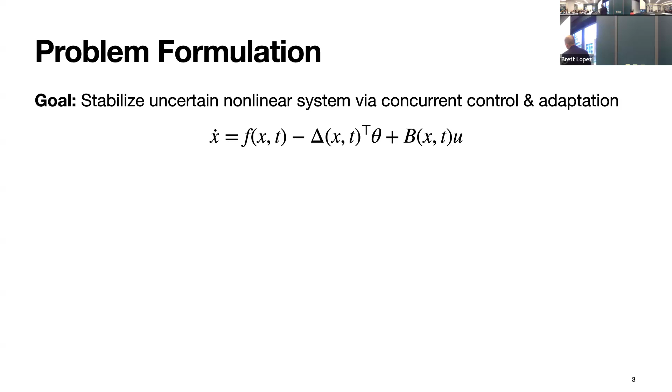All right, and so we're going to start off with this system, and we're going to impose this assumption. And this should be the only assumption that we really impose throughout the talk, is that the parameters belong to some known compact convex set, right? Which really just means that we can basically bound the parameter estimation, right? Which is pretty standard in most applications, right?

You generally have a rough idea of, well, I know this parameter has maybe some distribution, maybe it's uniform, maybe it's Gaussian, whatever. But you can almost always formulate or impose this assumption without too much concern about what may happen. So we're going to impose that these parameters are bounded.

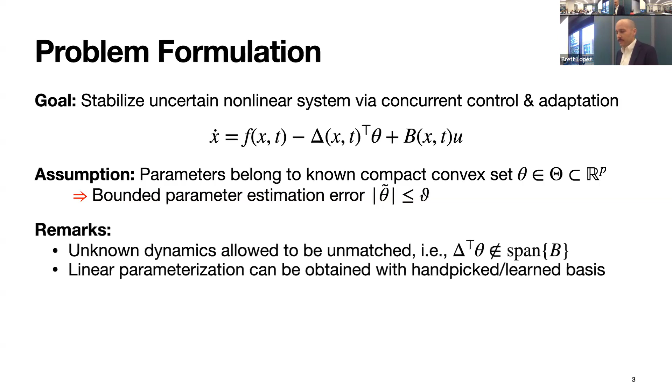And the thing that we're going to relax the most, and this is what we'll talk a lot about today, is we're not necessarily going to impose that the uncertain dynamics are matched. So we're going to let them be unmatched, which means that they can be outside the span of the control input matrix. And for those that haven't dealt with adaptive control before, once you relax this condition, the problem becomes really hard, right? And I'll show you why in a second.

And for anybody who's nitpicking about, well, linear parameterization, that's not very general, you can stop listening if you want.

That's your choice. But in most cases, if the system isn't linearly parameterized, you could always handpick basis functions or learn basis functions to represent those uncertainties as linearly parameterized. Now, of course, you lose some of the physical interpretation of the parameters, but you could always apply this re-expression of the uncertainties as linearly parameterized.

All right, so those are the two. Well, the main assumption is linear parameterization. The other is bounded parameters, or you have a bounded set. But we are not going to impose that the uncertainties are matched, right? We're going to leave them fairly general.

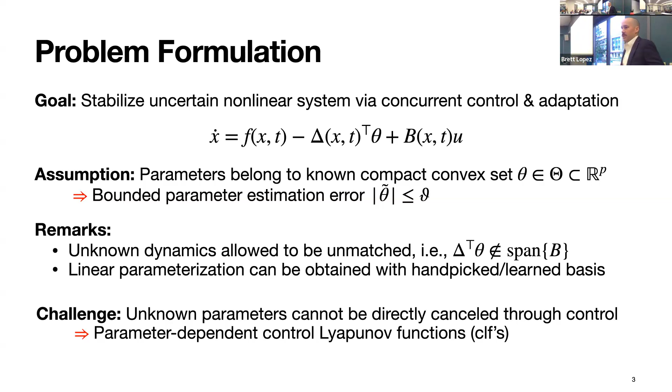All right, so why does this happen? Well, let's go back and do a little bit of review of the certainty equivalence principle, which is kind of the bedrock of adaptive control, right? And so the idea behind the certainty equivalence principle is a fairly intuitive design philosophy, which states that you're going to design your controller as if you know the parameters offline, and then you simply replace the parameters with their estimates via some adaptation or estimation. It's a very powerful design philosophy, fairly simple, fairly intuitive, which is why it's probably so popular. It's pretty effective.

Now, of course, the caveat here is this requires a suitable adaptation law, but we'll get there as to what that actually means. And so this proposition, which is pretty easy to prove, states that if the model's uncertainties are matched, so they're in the span of the control input matrix, then some suitable CLF that satisfies the stability criteria does not depend on the unknown model parameters themselves.

So the easiest way to see this is, now you have these uncertainties being multiplied by your control input matrix, within the span of the control input matrix. I can simply define this new control input, again, assuming that I know the parameters. I can get this new system that does not depend on theta, right? So it doesn't depend on the unknown parameters. And I could design or compute a CLF for this system. And since the system only depends on X, intuitively, of course, it's not going to depend on theta because theta no longer really exists in those dynamics.

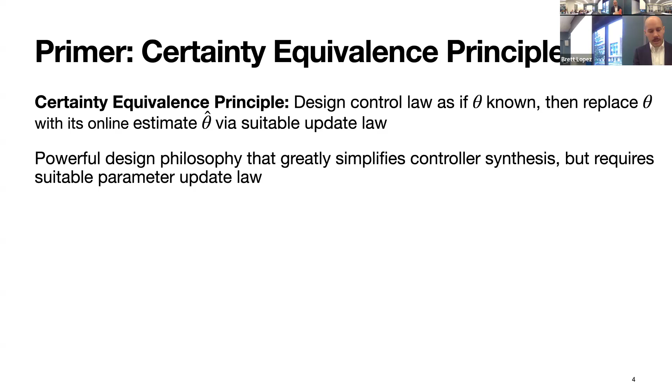In some cases, can't you just get a CLF which depends on the bounds and the parameters? Yeah, so I'm going to talk to you about the robust version of this. And so regardless, even in the robust case, you still have to pick a nominal value. So there's still some notion that this depends on whichever candidate. It might not just be one that's being updated online, but it still has some dependency in the sense that I have to pick something, so you kind of introduce this dependency.

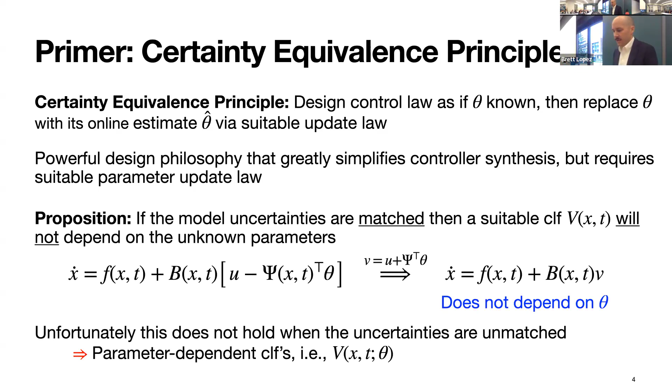All right, so what are a couple ways to handle this extra dependency that we now have to consider in the control design phase? So a nice segue to robust control. Probably not as in-depth as it should be, but typically in robust control design, you are looking at designing an input-to-state stable, or ISS, controller, where you pick some nominal value of the parameters and synthesize a controller that's going to be robust to the parameter. This can be conservative, depending on how large your uncertainty set is. And generally you can only get bounded error.

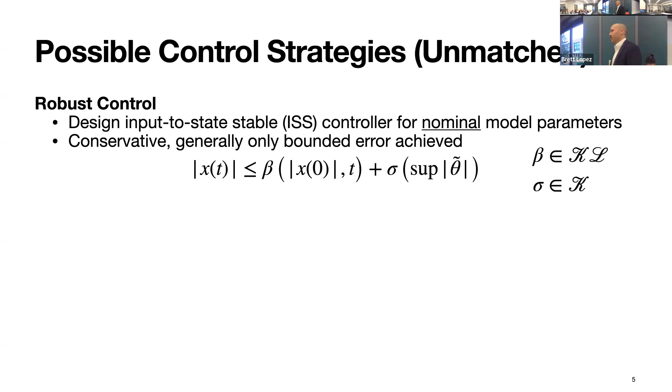So I have this expression here where beta is a class KL function, so this will tend to 0 as t goes to infinity. But then we have this class K function that depends on the max parameter error. And unless you just so happen to pick the absolutely correct parameter values when you're designing your ISS controller, this term is going to be non-zero. So you're only going to be able to get bounded tracking.

So one way to try to get around this and still achieve zero tracking error is to basically combine this robust control strategy with some online adaptation or online model estimation. This is where indirect adaptive control comes in. You still have your ISS controller, and now you combine it with a model estimator. And you can show that your dynamics will then satisfy this inequality bound, where again you still have the class KL function beta. And now you have a class K function sigma where hopefully this term tends to 0, since you're going to be updating theta. So hopefully theta tilde is going to 0, so your parameter estimates are hopefully converging.

But the tricky part is you now have to impose that the system is also ISS with respect to the adaptation of the parameters. As the parameters are being updated, that parameter update could actually destabilize your system. So not only do you have to be robust to the parameter error, you now also have to be robust to the transients of the adaptation, or of the parameter estimates.

And then there's direct adaptive control, which definitely departs from these techniques. This is what we'd call more goal-oriented control, where the adaptation is purely to achieve zero tracking error. There are no robustness guarantees per se; we're not imposing any robustness. So we're not going to get these nice bounds, but we can derive adaptation laws using Lyapunov-like stability arguments to ensure that the closed-loop system converges to whatever desired behavior we want.

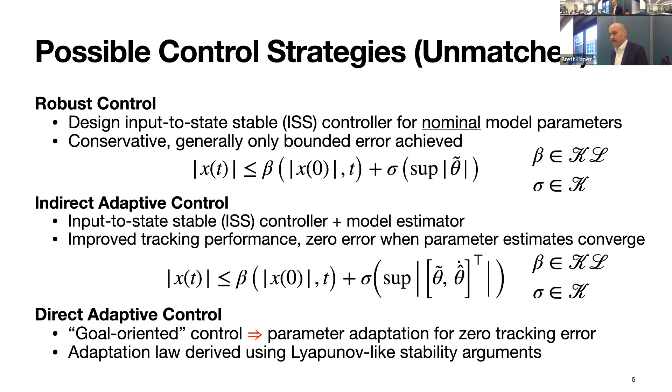And so what I'll be talking about today primarily is dynamic adaptation gains, which is a direct adaptive control framework where, not to spoil it, essentially we're going to be updating the adaptation gains online to circumvent the stability questions that come with parameter adaptation. Essentially we're canceling out the destabilizing terms associated with the transients of the parameter adaptation. And these adaptation gains are going to be updated individually, so very targeted.

I'll talk about a couple of extensions, one on adaptive optimal control and adaptive safety, where we employ these adaptation gains, combining them with value functions and also control barrier functions. And if there's time, I'll briefly talk about a recent paper we published at CDC on adaptive robust control contraction metrics, where we go back to the indirect adaptive control paradigm, but we synthesize these ISS controllers using contraction theory. But we only require ISS, or robustness, with respect to the parameter error, not the parameter transients, so we get something simpler and more systematic. We'll see if I have enough time to get there.

All right, so we're going to start off with this definition, which is pretty analogous to what you've probably seen in standard nonlinear control theory, where you start talking about control Lyapunov functions. But here we have an unmatched control Lyapunov function, and it states basically the same conditions as we have for a control Lyapunov function. But you want to satisfy this inequality for each theta. So for each possible model realization, you want to be able to synthesize a control Lyapunov

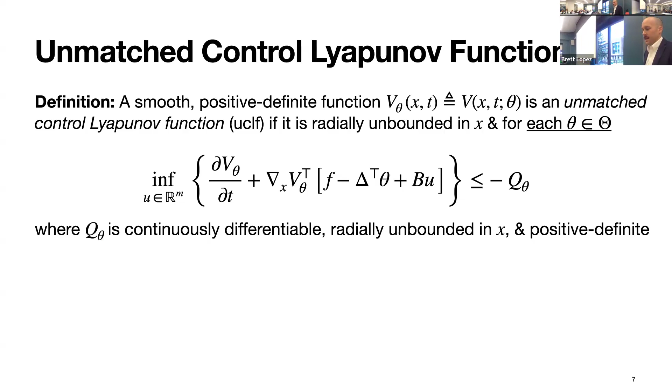function. And the key point here is that you're not just finding a Lyapunov or control Lyapunov function for all possible models. So instead of finding one control Lyapunov function that works for every model, you're basically finding a family of Lyapunov functions that works with a family of possible models. And what you could show is that these UCLFs, or unmatched CLFs, exist if and only if the system is stabilizable for all the parameters in our parameter set. Which is a fairly weak condition.

If you have a system that has a high degree of uncertainty, the minimal thing that you could ever impose on the system is that no matter what model comes up, the system still needs to be stabilizable. Otherwise, might as well pack up, go home, ask for another actuator placement.

You just said that V is radially unbounded, so you're just going to guarantee that X is bounded, not necessarily that it converges to something. So radially unbounded in X. We still are imposing that this will be 0 at the origin, or that actually comes up in Q because we'll be using Barbalat's lemma a lot. So it actually ends up being that V doesn't even have to necessarily be positive, or necessarily 0 at the state. Mostly, we'll be looking at Q.

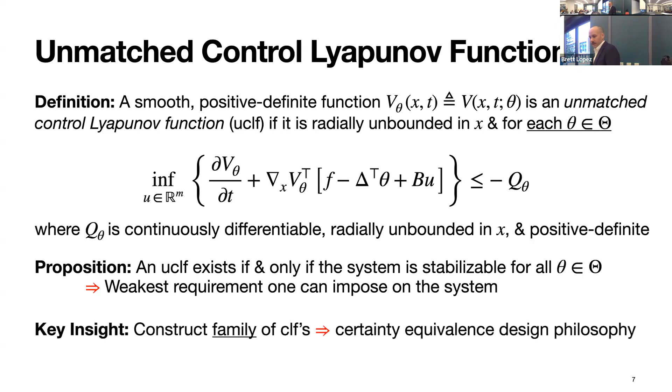So again, this proposition basically follows the same kind of CLF result that states the equivalence between stabilizability and the existence of CLFs. But now we're just broadening this out to stabilizability for possible models that the controller may encounter. And again, the key insight here is we're essentially going to be constructing a family of CLFs. And this family is going to be parameterized by the unknown parameters themselves, so by theta.

And this is, again, where we start to get back to the certainty equivalence design philosophy. You have a family of controllers or a family of control Lyapunov functions that depend on the unknown parameters. And ideally, if we design the controllers right, we can simply replace this dependency on theta with the online estimates of the unknown parameters themselves.

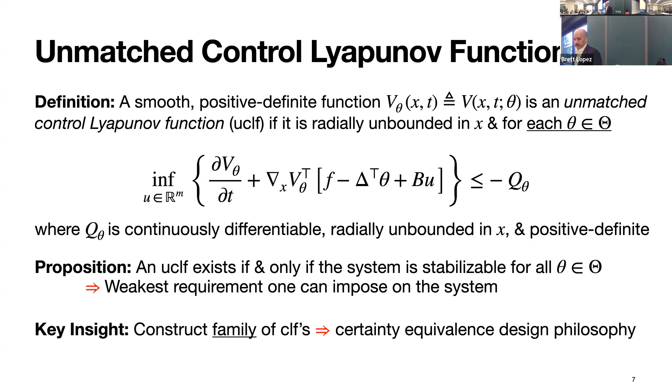All right, so if you were to take a naive approach to doing direct adaptive control when you have unmatched uncertainties, you could formulate a standard Lyapunov function that depends on your unmatched CLF plus your quadratic parameter estimation error. If you differentiate and apply the standard direct adaptation law, which usually takes this form, what you get is that this Lyapunov function derivative is unclear. It's not negative definite or positive definite; you can't really say anything.

So you first have this minus Q, which would be some negative definite function. But now you get these sign indefinite terms that arise because of the dependency on the parameter estimates themselves that this unmatched CLF has. So this basically just follows the chain rule. If I differentiate this and apply the definition of unmatched CLFs, I get this inequality, and I don't even know if this term is bounded; I can't really say anything about this.

And this is why unmatched adaptive control is hard: the question is, what do I do with this? Of course, if you have a robust controller, then maybe you can say something, but in general, you can't say anything. These are just sign indefinite terms.

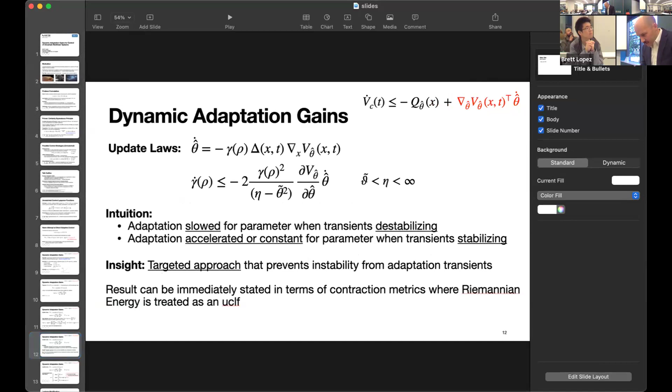Sorry. Apparently, my computer is talking about privacy and security, which is a very inopportune time. Hold on. See if I can clear this out. Okay, just so that we can see all the things that you need to see. Okay, all right.

So this bound that you pick, essentially what this does is this starts to dominate the transients term that again is sign indefinite, which then allows you to get the inequality that you need to then use Barbalat's lemma and all the nice results from traditional adaptation. All right, but the key was letting this adaptation gain now have some dynamics, and then taking some bound on those dynamics that essentially dominate the transients that would be otherwise destabilizing.

So some intuition about what's happening is that the adaptation on a particular parameter is actually going to be slowed. So you'll slow down adaptation on a parameter whose transients would be destabilizing. Right. So if this sign indefinite term actually ends up being positive, it means that this is now acting as a destabilizing term. You simply slow the adaptation rate of that parameter to make sure that you still get the negative definite function on the right side here.

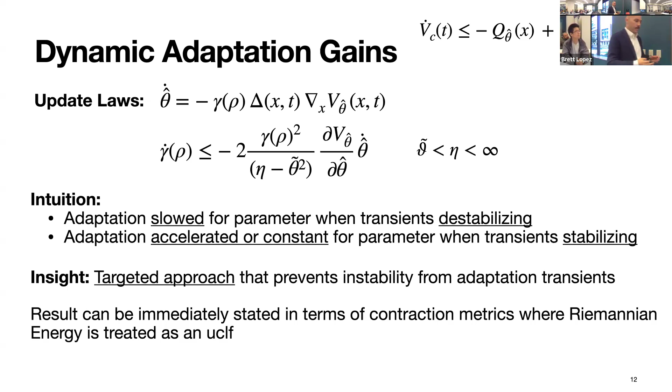Whereas if the term actually acts as a stabilizing term, so this is going to be a negative term here, then the adaptation can either be accelerated, so you can speed up the adaptation on that parameter, or you could just hold it constant because that sign indefinite term is now just acting as a stabilizing term. And so again, this is on an individual parameter basis, which means that I can really start breaking it up into which parameters' transients are being stabilizing or which ones are being destabilizing. And you start playing around with individual adaptation gains to make sure that your entire system is stable.

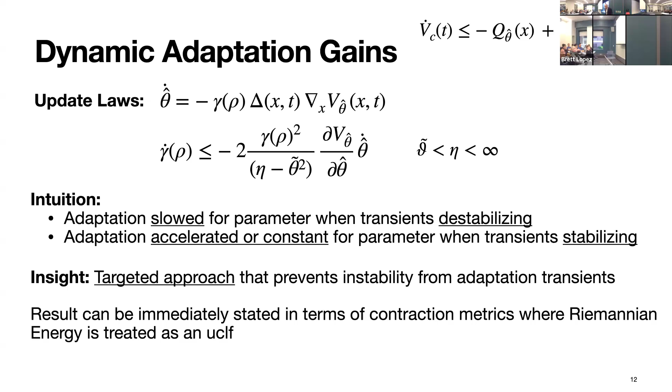Yes. Now, the inequality for gamma dot is kind of an implicit inequality for gamma dot, because theta hat dot depends on gamma. Yes. Yeah. So let's see. Theta hat dot just depends on gamma, so you've got gamma dot equal to some function of gamma. Yeah, and then from here, you just chain rule based on the new form of gamma. This is really the fundamental. I just skipped it because the expressions are a bit messy. If you're curious, I can show you after the talk or you could check out the paper.

But essentially if you were to go implement this, this is what your implementation will look like. So you have some dynamics now for rho: if this term, which is again related to the transients of a particular parameter, is positive, rho dot can be some expression. If it's negative and the adaptation gain is less than its nominal value, it could be some other functional form. But essentially you get almost a switching law between these rho dynamics. And this is just dynamics of rho. So as you integrate this, you simply plug this back into the function gamma that you had fixed beforehand.

Okay. And yeah, that works. So you can demonstrate this in simulation. Now, what I'll say is if you follow the proof, you can establish that your states are bounded, your parameter is bounded. By construction, your adaptation gain is bounded. But I never said anything about rho.

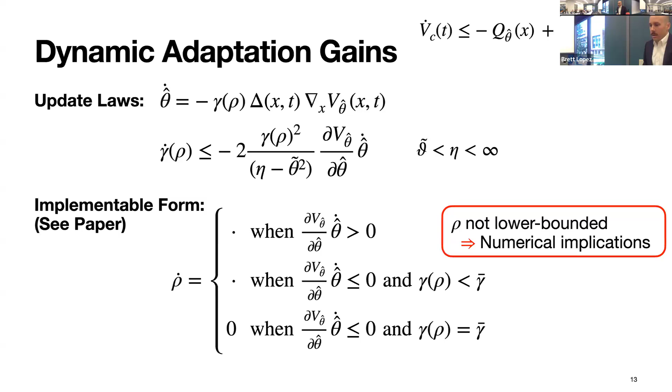Okay, all right, so this is where to address this unbounded rho kind of issue, right? Which again doesn't affect the stability; all that is sound. It's more about this implementation aspect of you have a variable going out to minus infinity, probably not very good. So we introduced this term called leakage, which has been used before in adaptive control, but in a slightly different setting. And what we're going to be able to do is ensure that the scalar variable rho is going to be lower bounded, and we're actually going to be able to ensure that the gain returns back to its nominal value, right?

Which is what you want, right? You typically design your adaptation gain to be something that is deemed to be acceptable or desirable. This kind of dynamic adaptation gain approach is going to probably lower the adaptation gain, so you'd like it to kind of return back to its nominal value if it can.

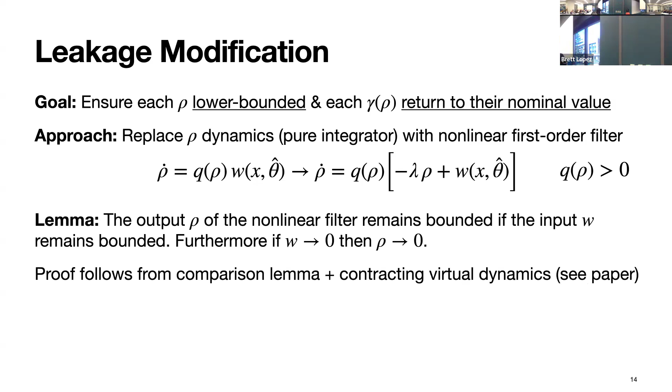All right, so a lemma which is intuitive at face value, not so trivial to prove, because we have this exogenous signal that's driving this first order filter, but it's also being multiplied by this nonlinear gain Q. But you can prove that the output of this filter, or really rho, will be bounded if that input W is bounded. And if W tends to 0, then rho will also tend to 0.

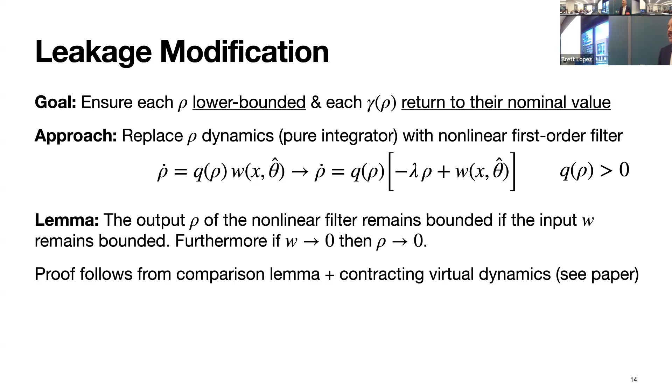So you have to use two things to get through this. One is the comparison lemma, and the other is contraction of virtual dynamics. So contraction rears its head again. If you're interested in that proof, I recommend seeing the paper. It's a shorter proof, but it takes some thinking about whether or not it's true. It is true, but it wasn't immediately obvious to prove. But like all proofs, the proof is straightforward. The path to actually getting to that proof is not so straightforward.

So then what you can prove is that if you now use these rho dynamics here, which are governed by this nonlinear first order filter, you still get those same results, right? You still get that X is stable and converges asymptotically to the origin using this adaptation law, where the rho dynamics are given by this first order filter, where you can also guarantee that rho will go to 0. Of course, the adaptation gain will go back to its nominal value asymptotically as well.

So not only do you get convergence of the state, but you also ensure that the gain returns to its nominal value. And of course, correspondingly based on the lemma, that scalar variable rho will also be lower bounded.

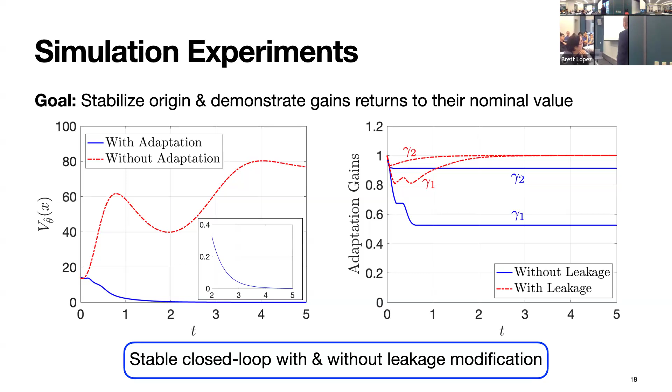So this demonstrates that, at least for this example, maybe an academic example, all the proofs are experimentally verified in simulation, right? So experimentally verified. Now, can we generalize this a bit? And can we make this more applicable to something broader like optimal control?

Okay, so I'll try to wrap this up. I know I had some technical difficulties, so I'll get to these slides quickly. This one has a lot of pictures, so

this quickly. But the claim, and unsurprisingly this actually goes back to Kalman, is that a valid value function for some optimal control problem, so the value function here is just the cost to go given some control policy pi, is also a control Lyapunov function. So the value function, say we're talking about an infinite horizon control problem, is really just the integral of this stage cost.

And so given some policy pi, the value of that state is bounded, where our stage cost is 0 only if our state x is at its desired state. I put this in quotes, because this isn't a real proof, but it satisfies all the properties of a CLF. It's positive definite, zero when x is at your desired state, and the derivative of that function is negative definite. So it satisfies the conditions that you need for a function to be a CLF.

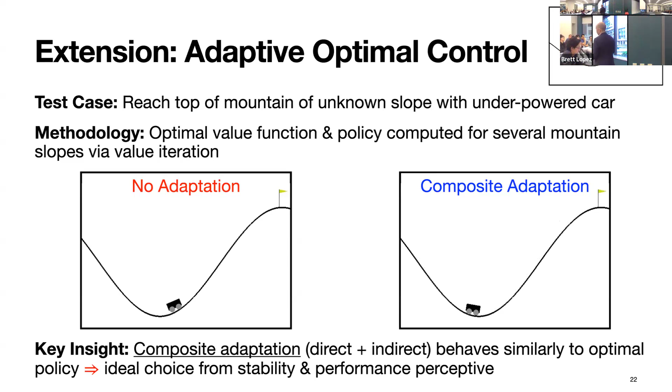Okay. All right. We also applied this to adaptive safety. I'm going to skip this in the interest of time. Well, maybe I'll talk about this quickly. You can basically apply the dynamic adaptation gain idea to control barrier functions, where you're trying to ensure that some uncertain system stays in some set. So you're trying to ensure forward invariance of that set,

and compute unmatched control barrier functions, which are an analog to the unmatched control Lyapunov functions. And you can do the same song and dance that we did previously, to ensure that the system always stays safe, even if you have uncertainty.

All right, I won't talk about this. I know because this is your favorite part, on contraction. Yeah, in the interest of time, I'll have to skip it.

So to close, when you have unmatched parameters or unmatched uncertainties in your system, this typically leads to parameter dependent CLFs, which means that the parameter adaptation transients can destabilize your system. So to tackle that, we developed this dynamic adaptation gain methodology that essentially adjusts individual adaptation gains online to cancel out those problematic terms.

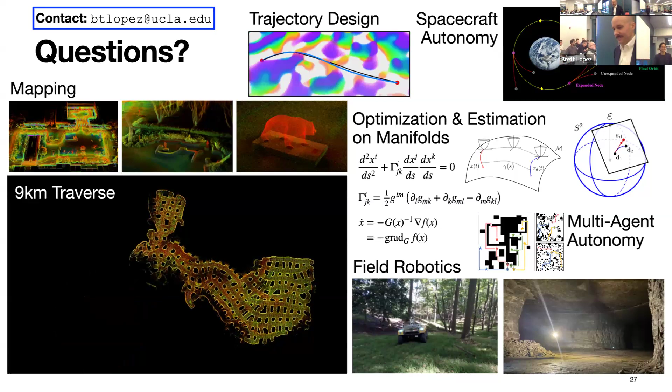So if you redefine X3 to be X3 minus theta X1, then with the new X3 you cancel out all the terms. So say that first part again. If you define X3 to be X3 minus theta X1, so define a Z3 equal to that. Yeah, Z3, so then you've got X1 dot equal to Z3. Z3 dot equals a big mess plus U, but you can use the U to cancel out the mess, then you have X1 dot equal to Z3, Z3 dot equal to U, and you can stabilize that with a linear controller.

But essentially you're doing feedback linearization, right? Well, yeah, but it's a controller. Yes, so you could do feedback linearization. My point is what you're proposing would be equivalent to feedback linearization, and you could show that the diffeomorphism or transformation required becomes singular at the origin. I need to work through your particular substitutions. Oh, I see, you mean the transformation going from X3 to Z3. No, that one is linear, but if you follow the generic feedback linearization procedure, when you check controllability, you lose controllability at the origin. Not this system, though.

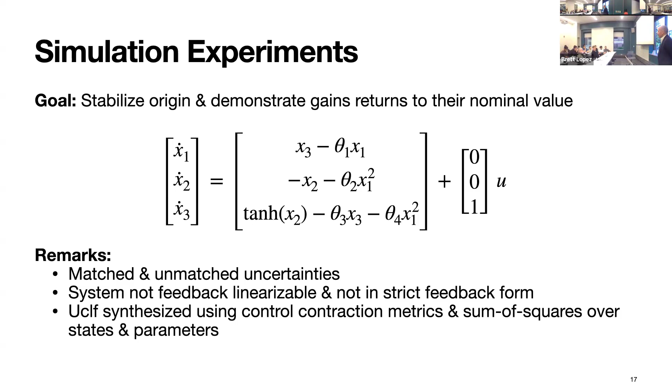Yeah, so you mentioned there's this plug and play type of feature where you can put your adaptive controller onto a different controller. Could you speak a little bit more to the process for doing that? Does there need to be any consideration on the design of the controller and your adaptation onto it, or can you take just any nominal control and then plug your adaptive system onto it?

Yeah, so at least in the context of the plug and play with the matched update law, this I can replace with anything that I know from literature. So that's very much plug and play. And again, that's because with these parameters you can just redefine some new control. But the other plug and play element, of the actual controller itself, what you really need is to have a family.

So if I just take one controller that works with one model and apply it to another, I still need to have some characterization about how that controller, how that CLF, should change depending on whichever system it's being applied to. So at least within the optimal control context, the way that I visualize this is, let's say I have some robot farm and I'm training a policy on 100 different robot manipulators. Each one has their own unique parameters, right?

I could basically then take those controllers and create a family of controllers based on my understanding of what the individual parameters of those robot arms are. If I were to take that family and apply it on some other robot arm that may or may not be in that family, I don't necessarily know, I could then pick from that family of controllers the best controller using the adaptation concept.

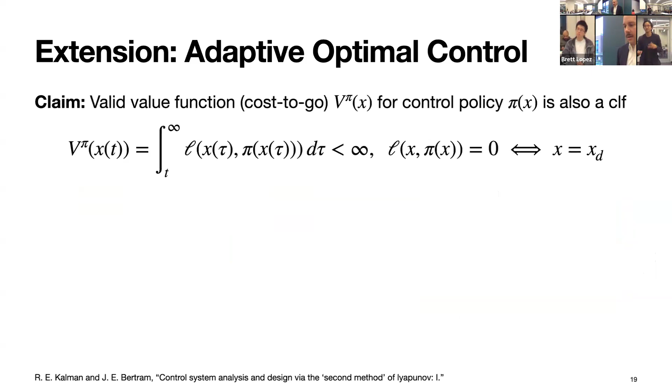Sure. I have some questions. So I think the academic example was used in your previous paper. Yes. With using the CCM there. Yes. The convex optimization to find the control. But you solved the actual matched case there for universal adaptation, but the gain was fixed. Yes. So this is the generalization version. Yes. So because you work on the same problem and showed that both work, what's the benefit at the end of the day? Yeah, so yes, we had a previous paper that

was not on an individual parameter basis. So we basically had one kind of admissible gain that was affecting all the parameters. And so the problem with that, I mean, it works, but if one parameter's transience is going to be destabilizing, that's going to affect the adaptation gain of another parameter whose transience is fine, not affecting the closed loop system at all. So you then get this propagation of lowering the adaptation gain to all the parameters, which isn't really desirable. You want a more targeted approach that says, if this parameter's transience is problematic, let's just slow that one down, and all the other ones can keep doing what they're doing.

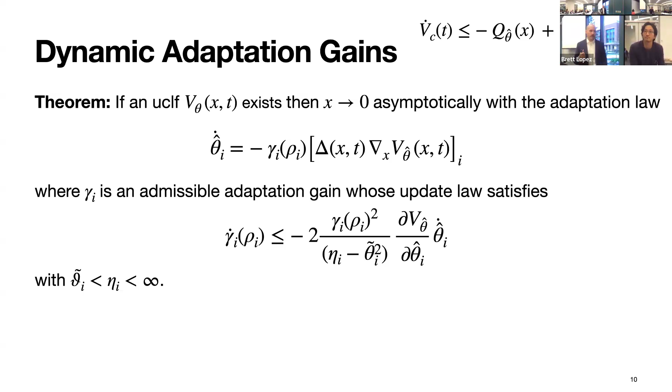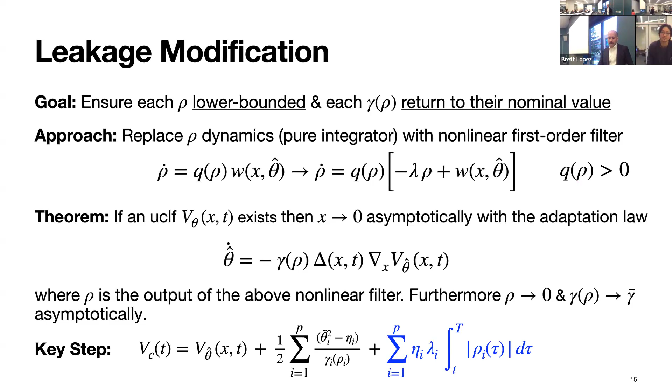So that's the generalization of our previous work. But the proof on this one is a bit more involved, because now we get this set inclusion term, and also proving the gains return to their nominal values was not trivial based off the form of this return. But it's really just doing things on an individual basis, and that also allows us to do this plug and play with any matched adaptation too.

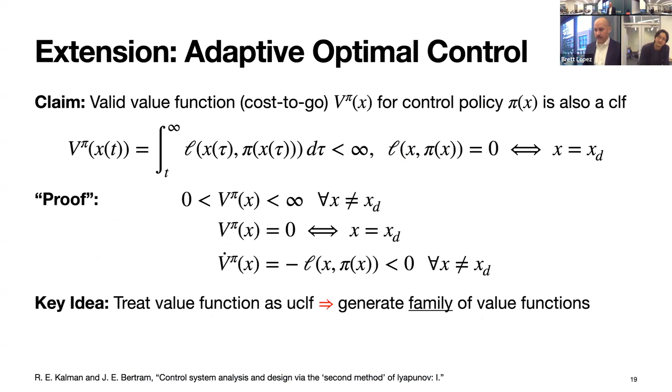One last question. If you have a choice and you implement on the hardware, since you said this is like dual, which one would you like to use, CLF or CCM? Yeah. So given that I love Riemannian geometry, the whole contraction idea, I definitely really like contraction a lot. So contraction, if I go to the slide, is basically a way of rethinking about stability and rethinking about control Lyapunov functions.

The power in CCMs is that your CLF does not have to be an analytic function. It can be left as the integral of some Riemannian energy. And there's some really nice benefits to that, especially for high dimensional systems. Finding CLFs in general is already hard, but if you go from CLFs into the contraction realm, you can more systematically synthesize contraction metrics that give you some really nice convergence properties. So when in doubt, I use contraction. That's usually what I start off with, because I can formulate the search for the metric easily as a convex optimization.

If it comes back with a constant metric or a metric that is integrable, then it just gives me the CLF that I would have found anyway, without the added benefit of solving a convex optimization. So I typically always start off with contraction, formulate the metric search, and then depending on what it returns, I know, okay, that's an analytic CLF, so I could use CLF theory, or that is a non-flat metric, so that's clearly something I could just use contraction for. So aside from it being a really nice theory, implementation-wise, having these convex conditions is really nice. That's the main benefit, I think.